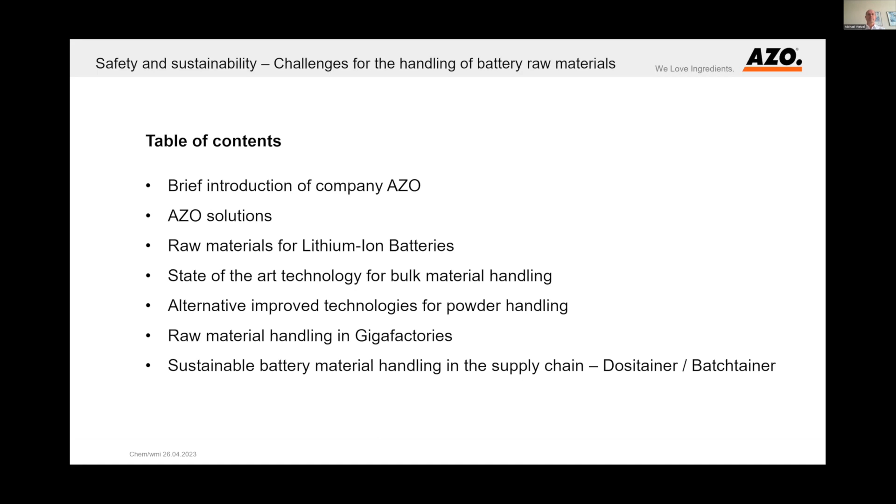The company AZO was founded in 1949 by the family Zimmermann. Next year we'll have our 75th anniversary. The foundation stone of our headquarters was laid in 1963 here in Osterburken. In our headquarters, we employ approximately 700 people worldwide. We have more than 1,000 employees across 9 AZO group companies. The turnover of AZO is around 180 to 200 million per year.

After this process step, we take over the material and feed it to further process steps. We can also provide the operating and controlling of the whole process together with the monitoring and documentation of the process.

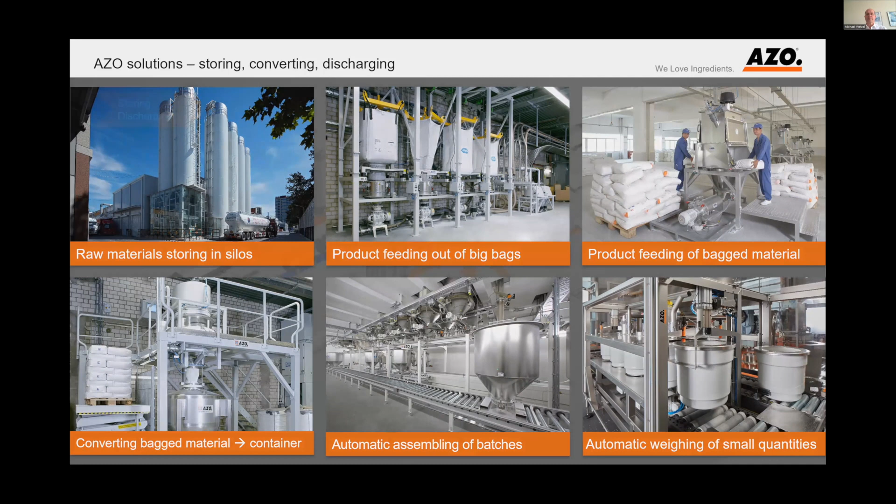Our core competences are also dosing and weighing. We manufacture screw feeders and weighing equipment. We do all kinds of feeding and cyclone screening. We can provide solutions for pneumatic conveying, whether suction conveying, dense phase conveying, or other types. As mentioned before, we're very strong in controlling and automation. Tracking and tracing is a very important issue, especially for the battery industry. And of course, we provide visualization systems and the collection of data.

Before we start with the design of a material handling and dosing system, we have to characterize the material properties. I would like to show a short movie which shows the process and the classification of raw materials into different groups. We've classified them into 5 groups, and we call them ingredients. This movie shows it shortly.

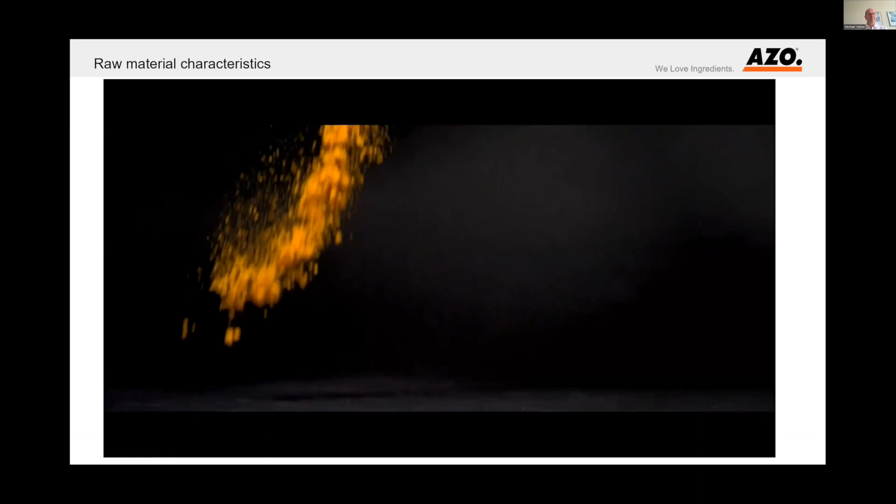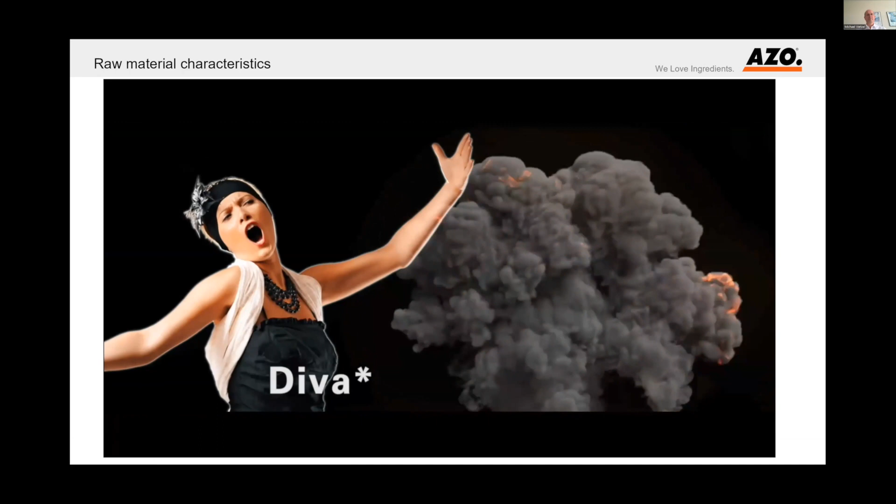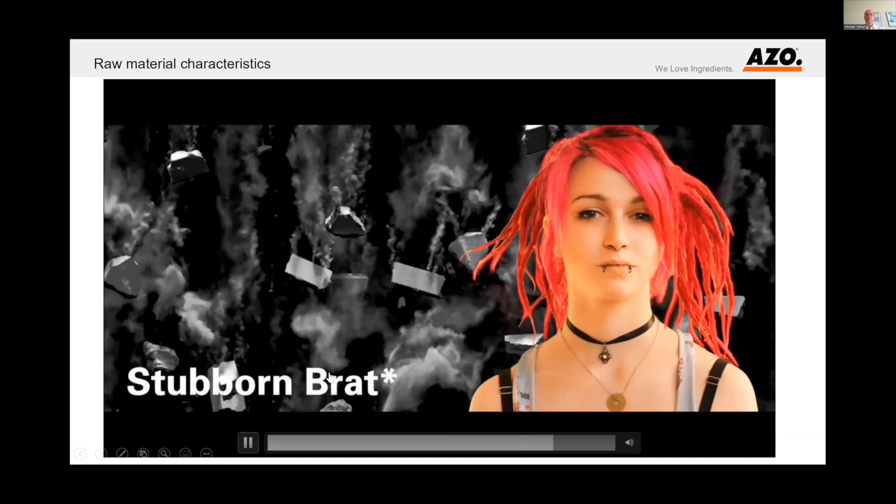All raw materials have their own individual properties and characteristics. Our knowledge of physical analysis is one of our core competencies. No matter how differently ingredients behave, we master them all. There are highly flammable, challenging raw materials, the divas. Others are difficult to control, free-flowing and dusty, the free spirits. Some raw materials are sensitive and fragile, the weaklings. There are obstinate ones that tend to cake and flow poorly, the stubborn brats. And very particular raw materials are abrasive or toxic, the meanies.

Okay, so this was a short overview about the different characterization of groups of raw materials. Now we'll have a look at the battery raw materials, and we'll see that some of them also belong to the unpopular products, like the meanies, which were mentioned as the last group.

So in all battery factories, we have an anode and a cathode line. And we have active materials, binders, conductive materials, and sometimes additives.

The active materials for the anode are mainly graphite, also silicon, which could have a share of 5 to 10%. For the cathode, we have many different chemistries like NMC, LCO, LFP, and so on, and also different grades of these chemistries. For NMC, for example, could be 622, 811, and so on.

For the binders, on the anode side we usually use CMC as a binder. For the cathode, the typical binder is PVDF. If we look to the future, for example for dry mixing and dry coating processes, PVDF is replaced by PTFE binder, which has some special characteristics.

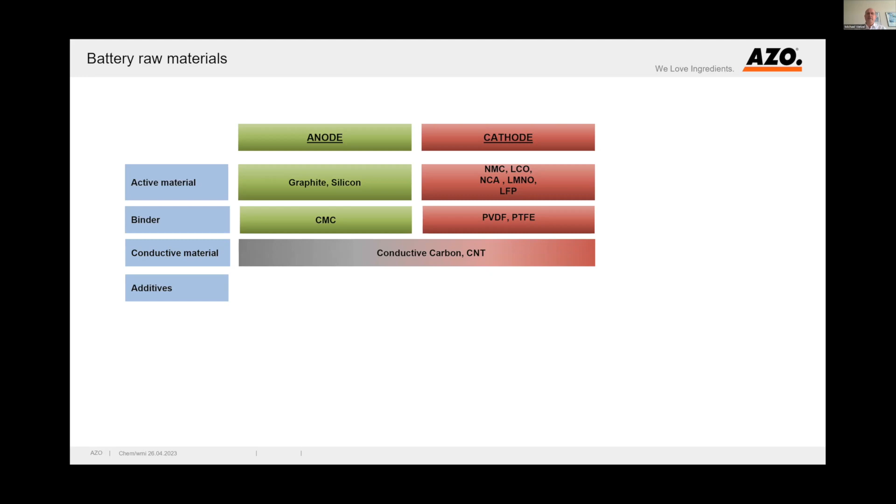The conductive material is always conductive carbon, and quite often carbon nanotubes also. These carbon nanotubes are sometimes added as a powder, or already prepared in a slurry and added to the mixer. There are few additives — typically one is oxalic acid, but this is not used in every factory.

Okay, so if we have a look at these powders, they have some typical properties. The powders are usually very fine, they are dusty, most of them are black except for the binders. And for all these powders, we have to care about operator protection.

Most of them are not hazardous, except for the cathode active materials and some carbon nanotubes, for example. But at least we also have to consider the OEB1 or sometimes OEB2 level for these powders as operator protection. There are some special materials.

I already mentioned this PTFE. This PTFE, for example, is very sensitive to shear and to high temperature. Sometimes it's a challenge to cool the material already during storage and to avoid any introduction of shear stress, because the fibrillization of this PTFE should be done later, in the next step — for example in an Eirich mixer, which is especially suited to open and fibrilize these PTFE fibers. So we have to care about the process protection.

And the most critical materials, as mentioned before, are these cathode active materials. There we have the issue of operator and process protection, because this cathode active material is always very heavy — we talk about a bulk density of 2 to 2.5.

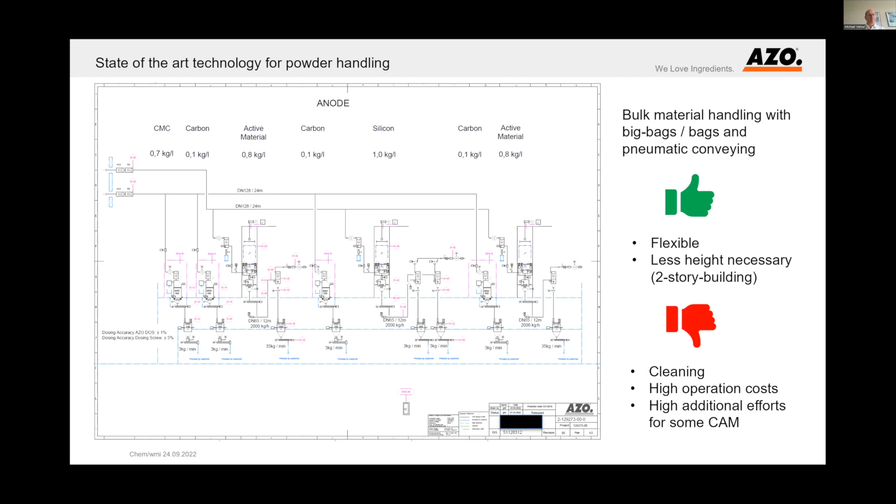Okay, now I would like to show some short animations about this core equipment in such a plant. So this is the principle of a bag feeding system.

So from this feeding station, you usually feed such a loss in weight feeder. This is an AZO-DOS, so-called AZO-DOS system. And the working principle is you can use it for batch process as well as for continuous processes.

If you have a batch process, it's quite simple. You have a gravimetric system, a load scale, and you weigh the material which is fed to the next process exactly. If you have a continuous process, you have the challenge to refeed this material during the process.

And usually the solution is that you do a gravimetric feeding during 90% of the cycle. And when you refill the scale, you have to stop the gravimetric feeding, and then you do a volumetric feeding for, let's say, 10% of the time. So this is a well-established solution for such a system.

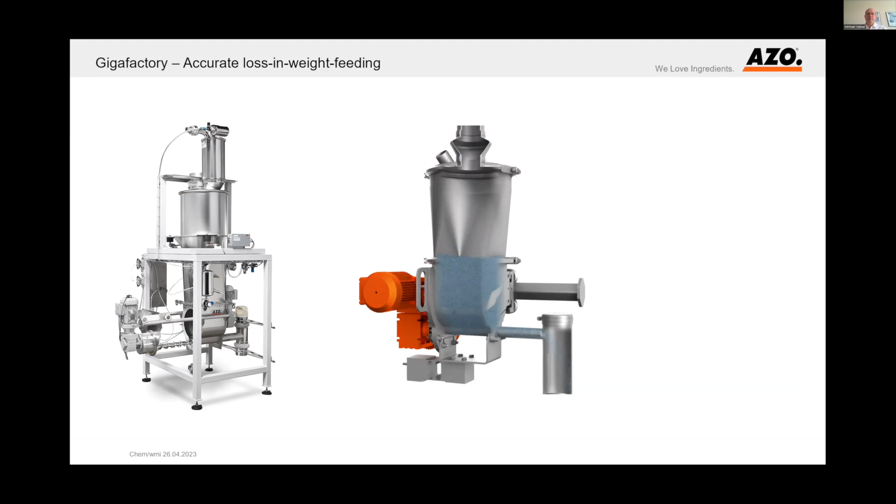Okay, so this is now, again, a diagram of the same system, but for the cathode here. And on the cathode line, we have another challenge, because for the cathode, we have this cathode active material, which is often hazardous.

In this case, we have a challenge to minimize the dust exposure and reach a higher OEB level. So usually it's requested to have an OEB3 level to minimize the dust exposure to the operators.

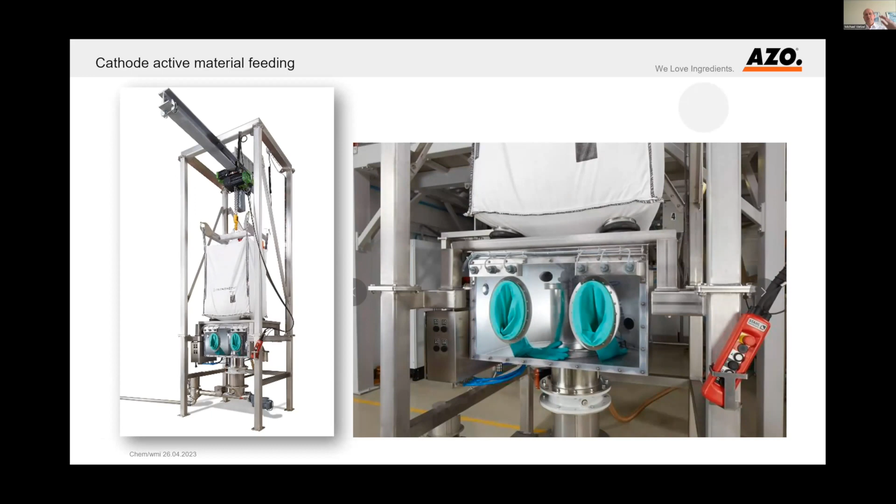And for such an OEB3 level, we have developed a special big bag discharge system. You can see it here. And I would like to show a movie showing the principle. I will stop speaking during this movie because it's self-explaining. So the principle is written down during the movie.

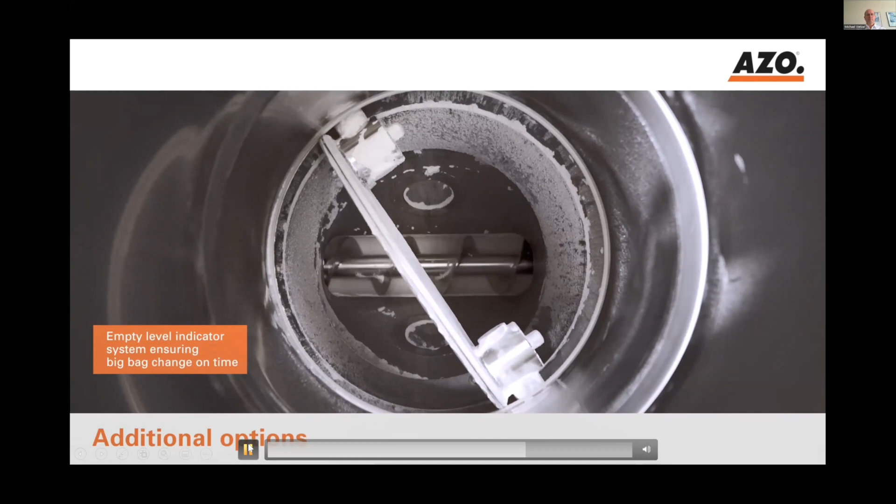Okay, so with regard to the time, I stop here because we just show some more options. But if you're interested, we can provide some more information.

Okay, so I would like to proceed now with a diagram showing an alternative concept. Generally, it's the same from the raw material delivery. We have the smaller materials in bags, the active materials in big bags. And the difference is we have a pure gravimetric system here without any pneumatic conveying.

And you can also see that we have one raw material feeding system, which is providing the raw material to two mixers, with a scale here, with a two-way distribution system. So this is quite economic because one powder dosing system serves two mixers.

And the advantages compared to this state-of-the-art combined system is the footprint of such a system is smaller. The operation costs are lower because we don't have to provide any dry air or even nitrogen for feeding or for transporting of the material.

Of course, we have also some disadvantages. The flexibility is a little bit limited because we just can provide the raw materials to two mixers. And of course, we need a higher building. This is usually a three-story building.

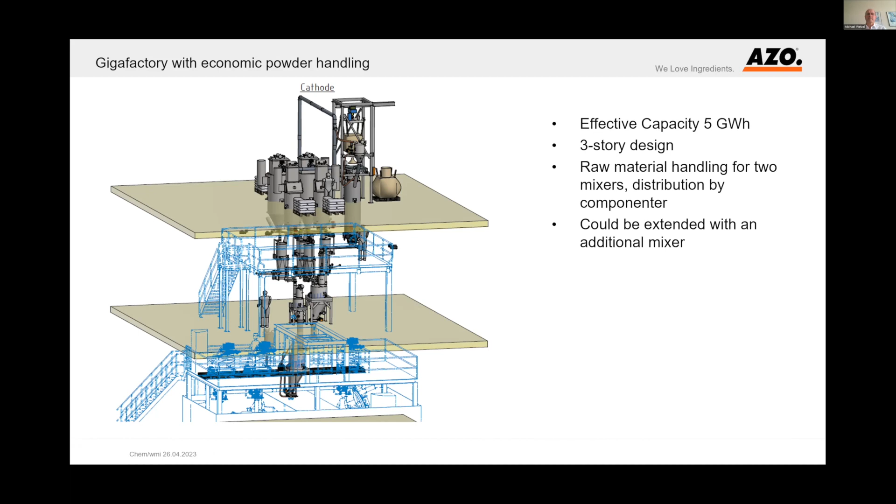In the battery industry, it's quite different, because if you consider the old-fashioned technology of planetary mixers, the batch times are several hours. Even if we go to the fastest system on the market, the Eirich mixers, we talk about batch times of maximum 20 to 30 minutes. But using such a concept would be possible. So we could use, for example, 2-3 mixers with 2 scale systems, or even more mixers. This just to give you an idea, and we are working on such concepts, especially with fast mixing systems in this industry.

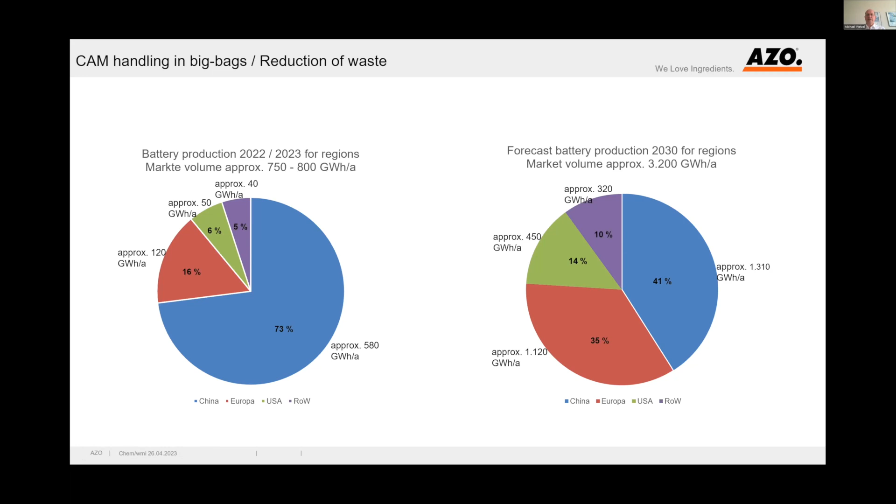So, regarding this calculation of big bag waste, I would like to focus only on Europe here. Based on these numbers which I've just shown, I've made a calculation about the waste which will arise. Again, I only focus on Europe, and only on big bags for cathode active material, and only cell manufacturers. Just to give you an idea, it's only a small portion of the whole industry.

So I've calculated based on the gigawatt hours today and in 2030, the cathode active material throughput in the plants, and based on these throughputs, I have calculated the necessary amount of big bags to fulfill these requirements. This is the calculation in big bags per hour, and this is the calculation in big bags per day. The production in such lithium ion manufacturing facilities is 24/7.

And the result is, if you take an average weight for a cathode active material big bag with inliner, we produce today between 5 and 10 tons per day of this hazardous waste, only with big bag material, with inliners. And this will increase until 2030 to 50 to 100 tons per day of hazardous special waste, only for the big bags and only for cathode active material.

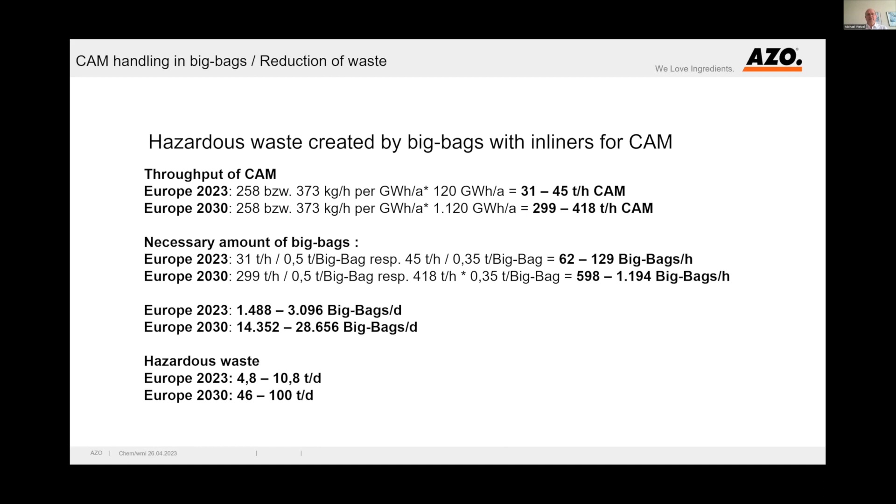So based on these numbers, our idea is to use containers or dositainers quite early in the supply chain. Our idea is to have cathode active material manufacturers fill the material directly into batchtainers or dositainers. And this animation shows the process of filling of such a batchtainer.

So you transport such a container, let's say with a volume of 1 cubic meter or even bigger, with an AGV or a forklift to the filling station. You place the container usually on a scale, and then you connect it with the filling flap, which is pneumatically driven.

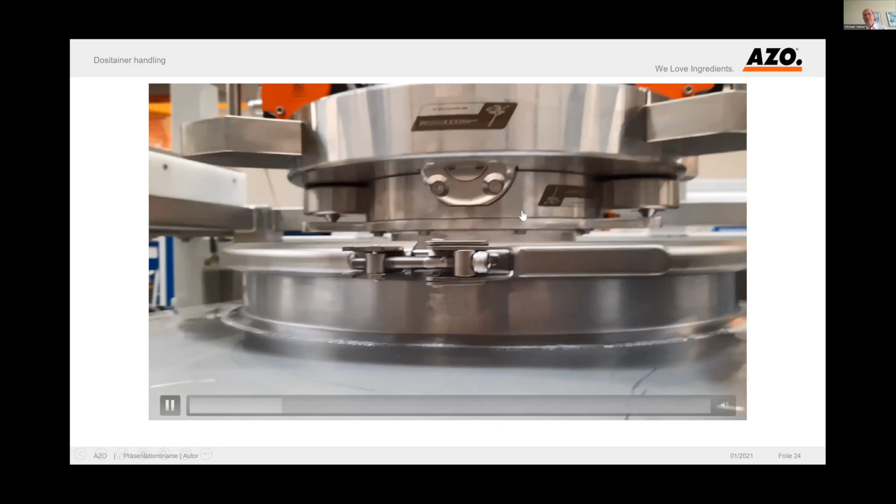So to give you a better idea about the process, I have this movie. This is such a filling station with split valve technology. This means it's used for OEB 3 level. On the container, we have the passive part here, this is the passive part of the split valve. And the active valve is lowered by pneumatic cylinders. Then it's connected and the flap opens.

So now this is in our workshop, it's not in a production facility. Now the filling of the container would start, and after the container is filled, just go ahead with regard to the time.

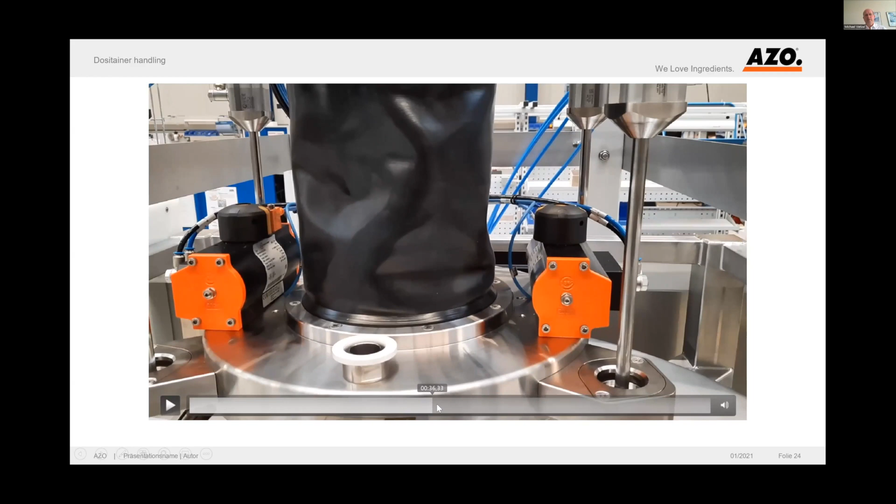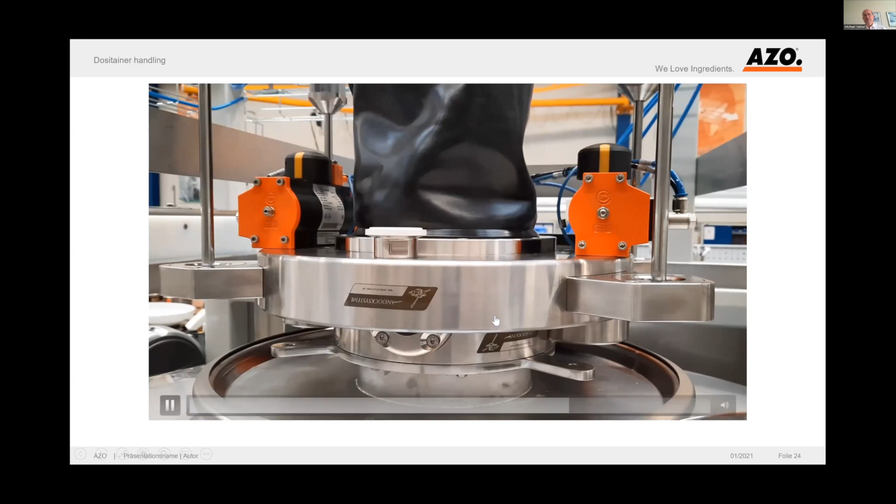After filling of the container, we close the flap and we lift the active valve again with the pneumatic cylinders, and then the container can be taken out from this filling position. And this is a completely dust-free system due to this split valve technology.

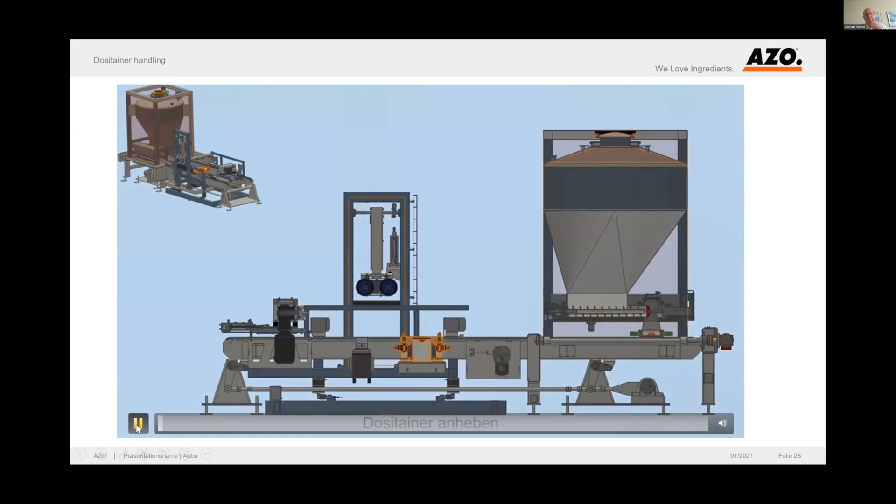Okay, so the next step, now the container is filled. That could be in the workshop of a cathode active material manufacturer. And then the container is transported to the cell manufacturer. And at the cell manufacturer, we have a discharge station. This is shown in the animation here. There are also different solutions for discharge stations. This is a quite complicated one with a roller conveyor. Could also be simplified with just a forklift or with an AGV. So in any case, you have to transport a container to the discharge position.

I have some problem with the movie.

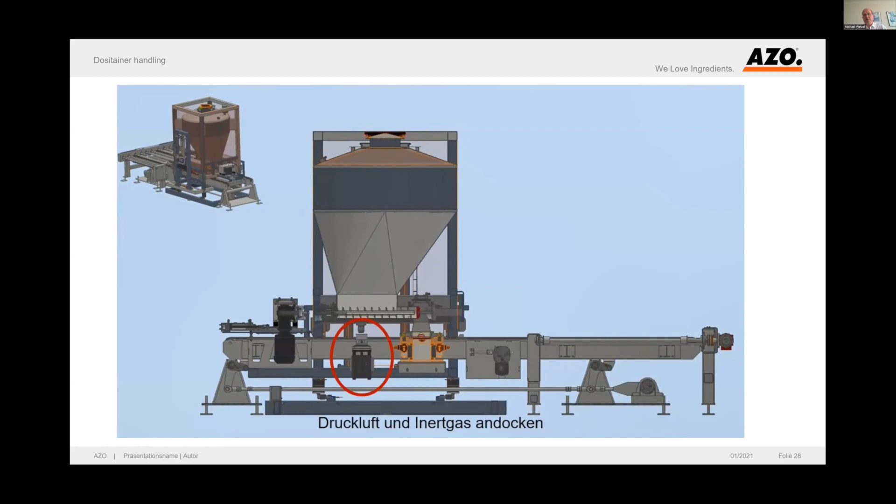Okay. The container is lowered. So the split valve, active passive valve, is connected. Then we connect the compressed air. So in the next step, we do the docking of the drive for the screw feeder. So the screw feeder is without motor, a part of the dositainer. And now we do the docking of the drive of the screw feeder.

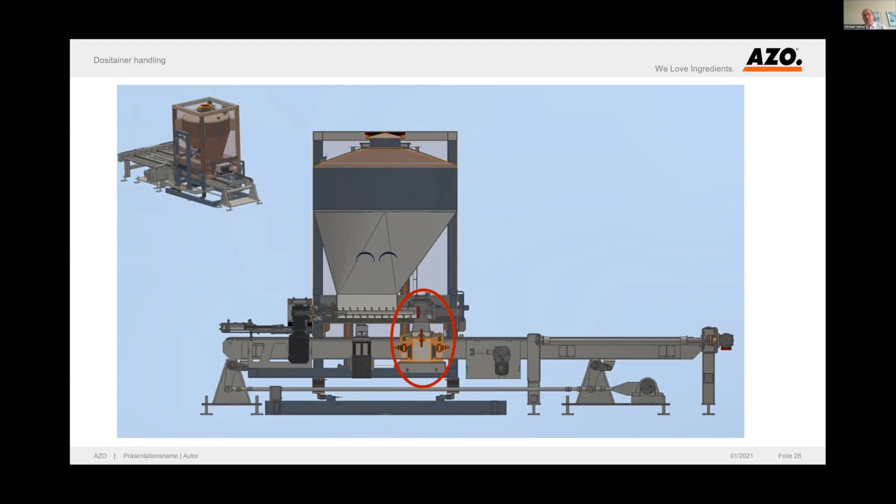We open the screw, the cone at the end of the screw, and we open the split valve. And now the dosing of the material is done to the follow-up process. So with a dositainer, we don't need an additional scale because this is installed on a scale, and we do exact dosing to the next process step.

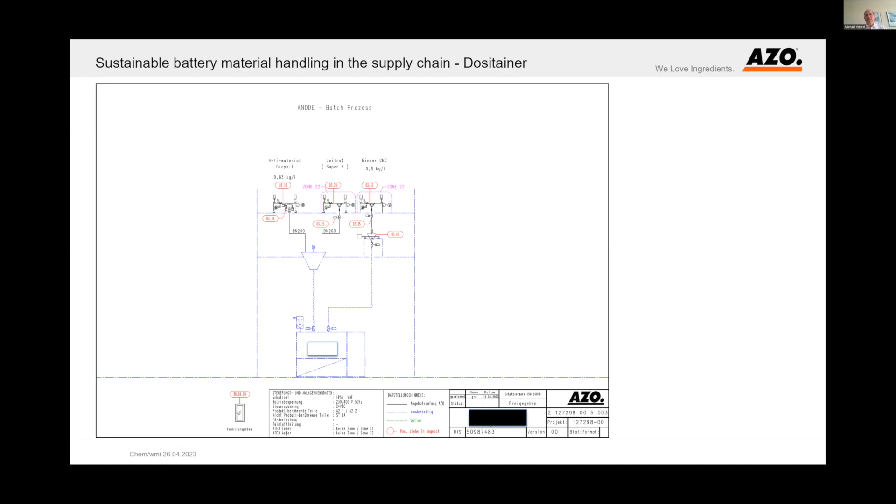So if we can convince the raw material suppliers and the cell manufacturers to establish such a supply chain, it would make the raw material handling much more efficient, safe, and sustainable. And it has many, many advantages. Of course, we have to also mention there are few disadvantages because the initial costs for such systems are slightly higher compared to a state-of-the-art system with gravimetric feeding or combined gravimetric and pneumatic feeding.

And the other challenge is it doesn't make sense if the active material supplier or the manufacturer is in Asia. So the transportation distance has to be quite short, but this should be solved in future because more and more active material suppliers will establish their workshops quite close to the gigafactories. And so if the distance for transportation is quite close, this will be definitely the most efficient, sustainable solution for this raw material handling.

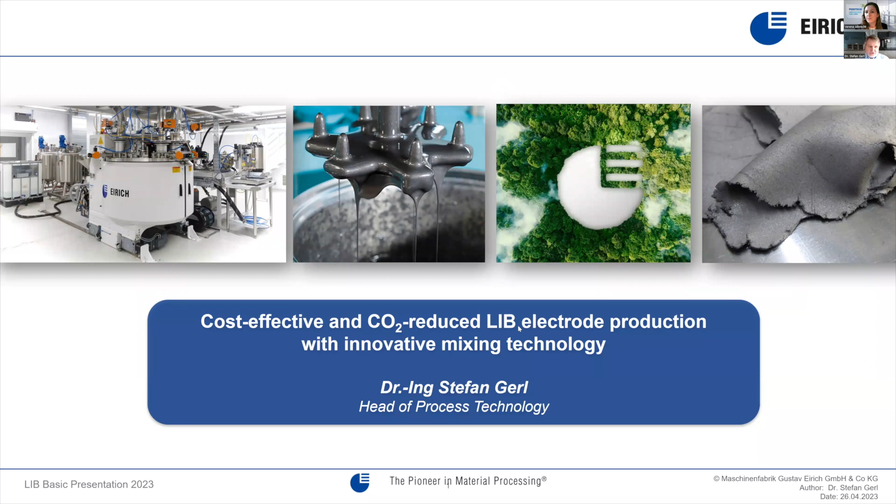Eirich is even a little bit older than ASO. This year we have our 160-year anniversary, a family-owned company similar to ASO. We are dealing in lots of different industries, but mainly in the lithium-ion battery application. We have different areas. This is the upstream raw material preparation for the active material, like cathode active material, mixing of precursors and functionalizing, meaning coating with nanoparticles, for example. On the anode raw material side, we have production of synthetic graphites by mixing of carbon, coke and pitch, which is then graphitized into synthetic graphites. More and more often customers are using our technology for silicon carbon composites, meaning it could be a coating like in the cathode active material, but it could also be incorporating silicon particles into a powder mix, which is then synthesized to a silicon carbon composite.

But today we want to concentrate on electrode production, where the classical electrode production is made wet, meaning we have to produce a coating slurry out of the powders. Then we have some special applications. We call it semi-wet, where we increase the solid content significantly. Typically, the forming is made by extrusion. And last but not least, the now upcoming process is the complete dry application, where we have to produce a structured dry mix with calendering and pressing, and then winding.

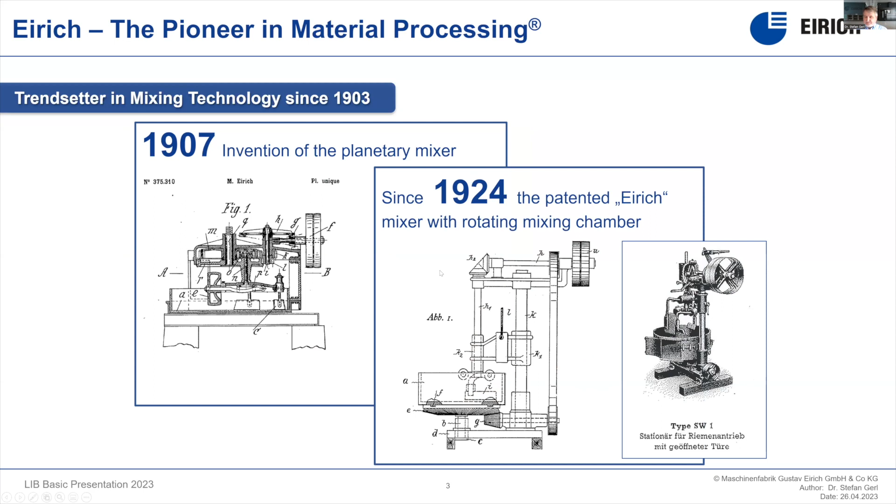As I mentioned, we have a rotating mixing chamber, which is taking care of the transportation of the material. If we have a static mixing chamber, like in a planetary mixer, the mixing tool typically has two tasks: first, transportation of the materials, and secondly, the mixing. If you increase the speed of the tool, the transportation typically collapses, because centrifugal forces push everything to the outside. This means these kinds of machines with static mixing chambers have to run at a reasonably low speed, which is not good enough to disperse and dissolve fine aggregates like additives such as carbon black or nanoparticles. So in the end, they need a second dispersing tool to do this job.

In the Eirich mixer, the movable or rotating mixing chamber now takes care of the transportation, so that we can work independently with our eccentrically mounted mixing tool. So we are free to choose the shape of the tool. We are free to choose the speed, which can be very gentle and soft, or very aggressive. We typically operate our machines up to 30 meters per second. For dry battery application, we can go even up to 45 meters per second, and this not only in the small scale machine, but also in full scale production machines.

We have a static wall and bottom deflector or scraper, which was made really scraping for the battery application, to make sure that we have no powder or plastic body adhesions on the wall or bottom, to be sure that 100% of the solids are really incorporated into the final slurry.

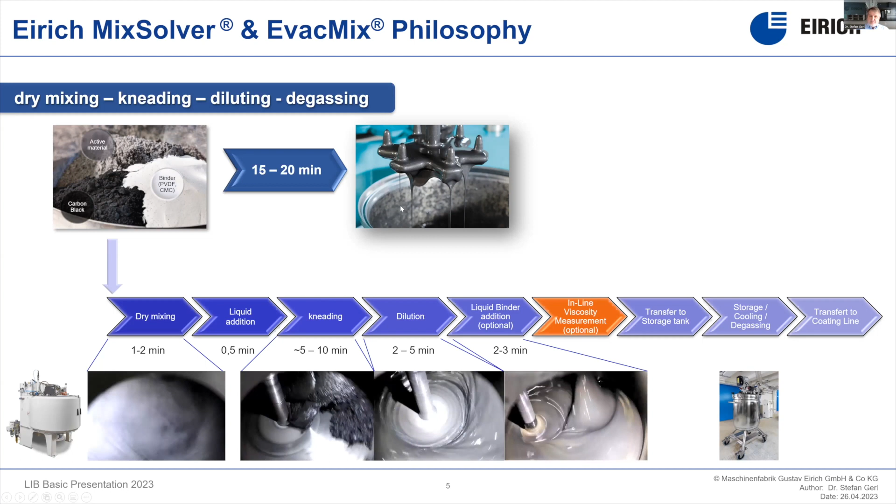The overall batch time, from in to out, we calculate between 30 and 40 minutes, depending on the filling of the machine, because the extraction takes a bit more time than in the past with our concentric discharge systems.

The advantage of the system is that you can adjust all parameters like time and shear rate, and even make sub-phases within the kneading phase. We have an additional possibility to measure viscosity like a viscometer inside the machine: since our tool doesn't contact the bottom or wall, we can stop the mixing chamber, start rotating the mixing tool at defined speeds, and measure the torque, getting a response like a viscometer.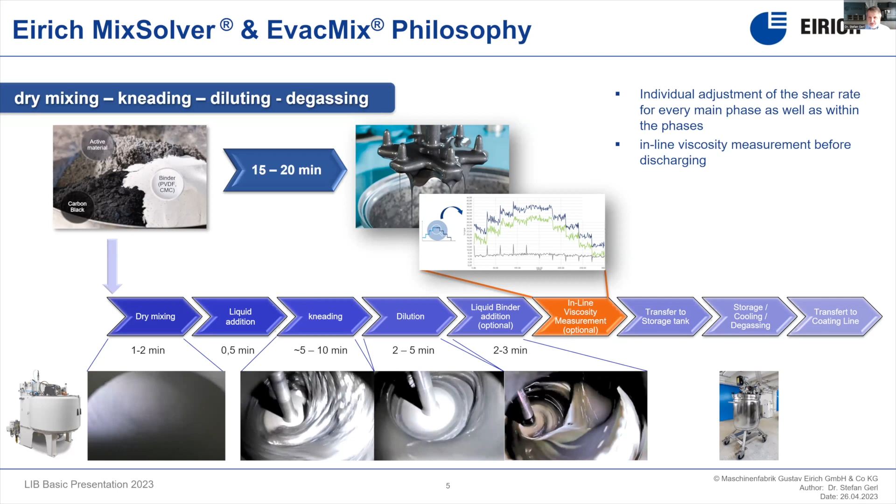This helps us qualify the slurry before discharging it into the downstream transfer and storage tanks. The inline viscosity measurement can be made at the last stage, or in between, and it could even be repeated several times if necessary, to qualify the slurry before discharging.

We have different options. With a non-vacuum machine, we typically apply vacuum in the storage and degassing tanks downstream of the mixer, which is a cheaper version. Some products don't need vacuum application during operation.

On the other hand, with our EvacMix vacuum technology, we apply vacuum in the final phase of the first liquid addition, doing the kneading already under vacuum, so that we don't incorporate any gas or air from the very beginning. By this, we can make sure we have a 100% degassed slurry already at the final stage of preparation.

I have to switch one back. Here we see a view into a full-scale production machine. It's a 500-liter R12 mixer. You see the different phases.

On the lower left side, you see the kneading phase, the plastic body moving at high shear rates through the machine. Here is the final slurry after liquid addition. You see the clean walls, coming from the effective wall scrapers. And here during discharging of the slurry, at the end we have a very thin layer of liquid covering, for example, the mixing tools, but this isn't interrupting our process.

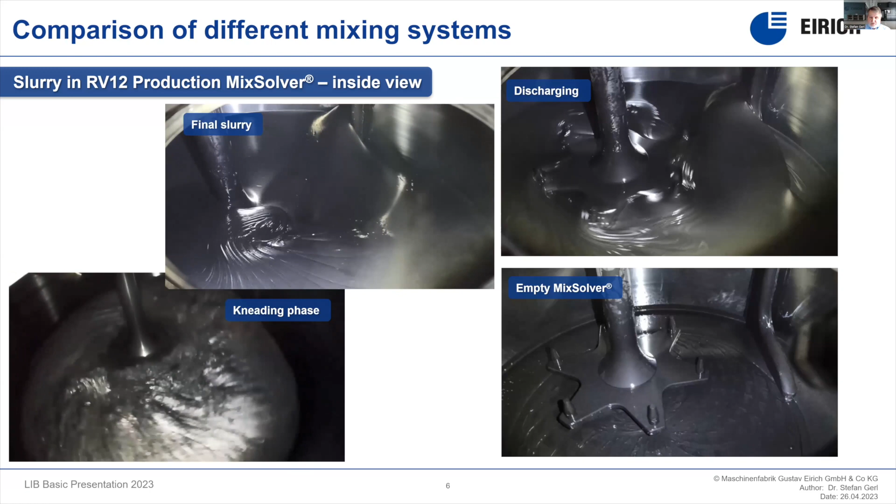So if we are working in a gigafactory batch by batch, this is good enough to prevent any problems in repeatability. By this, we can make sure that we have a high output out of a very small machine.

Lots of customers are asking for continuous process because the continuous systems have some advantages for the customer. But you see at the end that also a continuous system like a twin screw extruder is just the mixer itself and maybe part of the dosing system. As Michael Wetzel explained, changing over from gravimetric to volumetric in between is really continuous - these are the green parts. You have lots of equipment like powder dosing, pre-mixing, binder solution preparation, degassing, and storage tanks between the mixer and the coater as a batch-wise operation. This also has to do with the fact that no operating company in a gigafactory would allow applying directly out of the mixer without qualification and without any buffer tank directly onto the coating line.

Eirich has a quite similar solution - we call it Conti feeder. We have an automatic batching system which is even more accurate because we can control it, and we are extremely highly flexible in changing over the recipes. The material will be collected in a balance or charged directly into the mixer.

Then we start our batch process like shown before, and then we go into a series of tanks. Typically we have one tank directly connected to the mixer itself, which has the same volume. By this, we are sucking out the coating slurry. With vacuum, we can qualify it. We can take samples, and we can put in these systems with return pipes additional sensors. If this batch is qualified by the operator, we send it into buffer tanks, which are then connected directly with the coater, so that we have a continuous supply of the coater, which is the most important part for the customer.

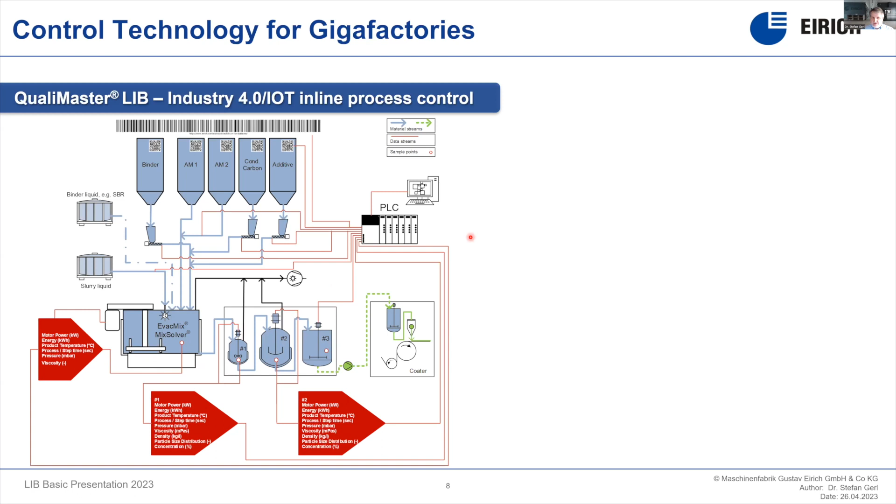All of this can be fully automated, starting with barcode readers for the raw material or QR code readers for raw material identification. We monitor all the data coming from dosing systems. We have the mixer with motor power, energy, temperature profile. We measure the viscosity with our inline rheometer. We have the same data from all the tank systems, which is all collected with our PLC and can be visualized with our ProView system, which makes it easy to compare different batches, set trend curves or tolerance bands to allow inline monitoring of the production process.

We are offering these collected data, of course, which can be used for data mining or artificial intelligence methods. We offer different versions, starting from what we call QualiMaster LIB, from ECO, which typically means OPC UA communication with MES systems. We have the QualiMaster ProView for data trending - we measure product temperature, we have inline viscosity measurement which comes with the machine without additional equipment, measure motor power, energy. And if you want more, we can add lots of sensors like viscosity and density as inline sensors, or even up to particle size distribution and concentration, which at the end is just a question of money.

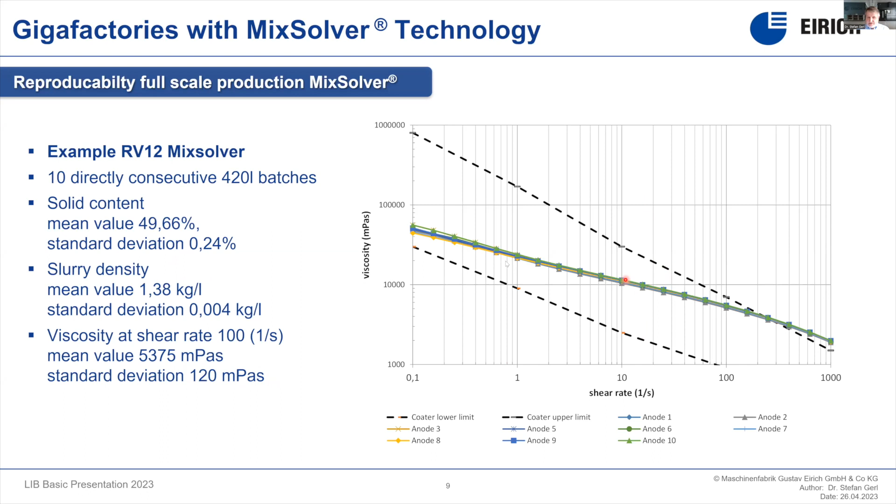This graph shows, out of a full gigafactory scale - a 5 gigawatt-hour factory in Asia - how good the reproducibility of our system is. We made for SAT 10 directly consecutive 420-liter batches, and you can see that the mean value for the solid content is quite low, and the standard deviation is quite low. This is mainly attributed to the dosing system, either the powder dosing or the liquid dosing. The same is true for the slurry density, because this is mainly affected by the dosing system, like the solid content. The viscosity is also in a very narrow range. The upper and lower black lines are the typical upper and lower limitations of the coater, and we are sitting in between with excellent reproducibility batch by batch.

How different gigafactories could look like - we have different concepts. One is for low capacity applications, typically in the range of 0.5 to 3 gigawatt hours, which means at the end we have one mixer located on the ground floor. As Michael showed before, we have a 2- or 3-story system. On the top level we have the bag and big bag handling station, a second floor with the automatic dosing system to achieve the necessary accuracy in powder dosing, and all the liquid dosing and liquid transfer system then on the ground floor together with the mixer.

Another project size is then a 5 to 6 gigawatt-hour factory with 2 machines in parallel, also like shown by Michael Wetzel - this 3 level system, on top again the powder bag and big bag dumping station, then the dosing, and then the distribution system between the 2 machines. It could be a valve, or it could be this movable container.

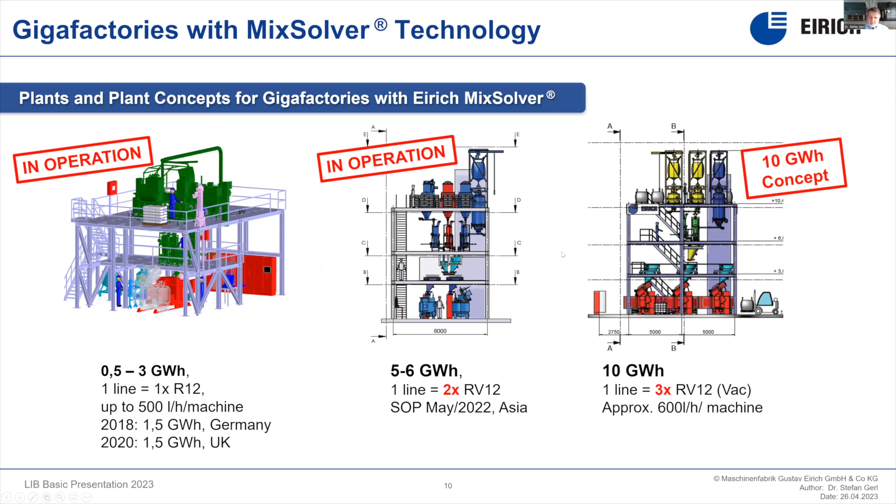This is then the option with 3, and we can go up to 4 machines in a row. This means you're really using the dosing system in the best way, distributing between the 3 or 4 machines, which are then working more or less in parallel. By this, we can reduce the footprint dramatically. And even if the height is a little bit higher than with a pneumatic system, we are still much lower in height compared to these extremely big planetary mixers.

There's a view into the UK big pilot facility where Eirich and AZO have delivered the machines. The complete control system is coming from Eirich. So the heart is, of course, the R12 mixer. We have then the AZO DOS systems here directly mounted on top.

We have the liquid distribution and dosing systems for small amounts like SBR, or the high amounts like NMP or water. And we have here, what we call batch pure, the movable transfer tanks. These tanks are connected to the mixer, filled with a slurry, qualified, and then moved manually to the next door.

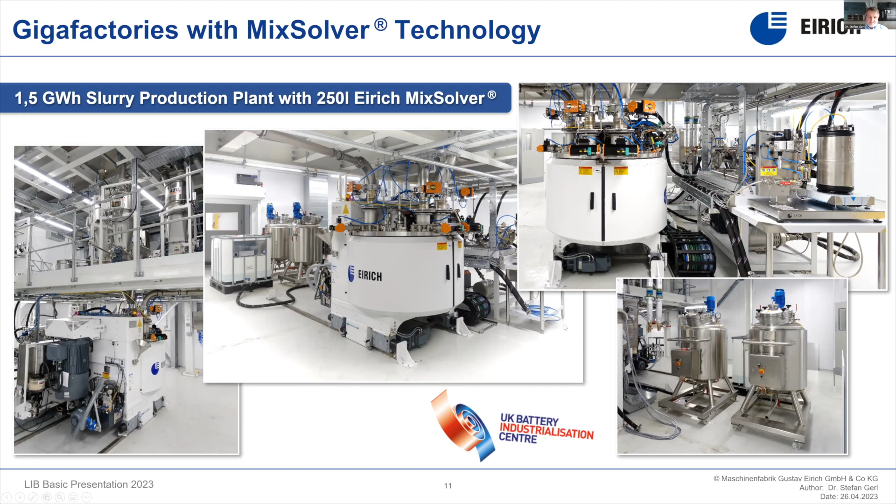This is a top floor with glove box system, with sack dumping station, with inline sack compactors. And here we have, for example, a big bag station for graphite, then also the dosing system.

What I want to give you an overview about is the energy consumption and size of the machine, comparing it with extruders and the classical PD mixers. Even if PD mixers are quite big, typically they have 1500 liter, 2000 liter, up to 4000 liter even. And if you use just 80% of it, this means in a 1500 liter machine, you can typically produce 1200 liter of coating slurry. But because of the long mixing time, typically 6 hours, you have an output which is just in the range of 100, maybe 150 liter per hour.

So this means at the end, if you want to go into gigafactory scale, you need a huge number of machines operating in parallel, which is, of course, then the problem to distribute all the raw materials and also to collect all the final slurry from the machines.

On the other hand, we have the extruders, which have a retention time in the range of 1 to maybe 10 minutes. They can produce an output in the range of small to medium-sized gigafactories, depending on the size. But they are limited in flexibility, because if you want to change over the product, you also have to change the screw, for example, or screw geometry.

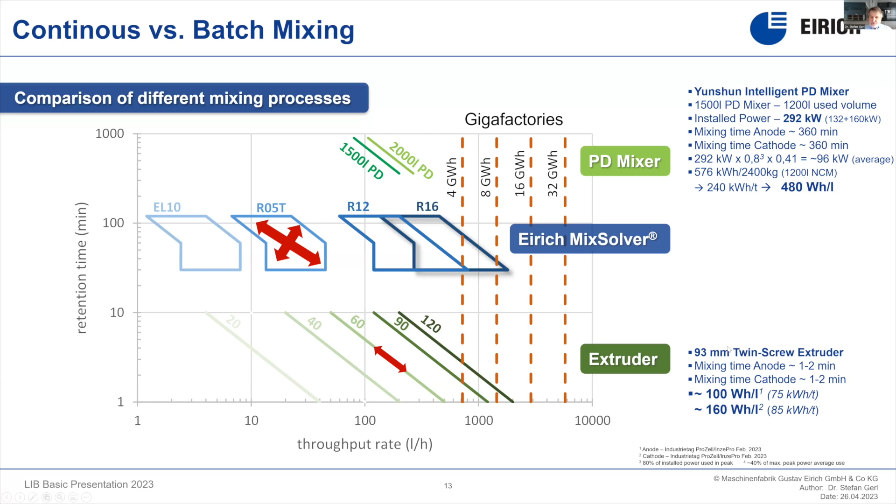With the Eirich mixer, you can go down even more. Even if we have big motors like 60 kilowatt for rotor and mixing chamber, we have just a very, very short peak where we need this extreme high motor power, and then it falls down again during the kneading phase. This means we have just an average of about 12 kilowatt, ending up with about 16 watt-hours per liter. This means we are saving, compared to the PD mixer, more than 90% of the energy.

What does this mean in view of costs? First of all, of course, we have the cost for the electricity. And we're talking here about gigawatt hours of electricity, for a 15 gigawatt hour plant with about 3,000 liter capacity.

For a PD mixer, we already have 20 gigawatt hours of electricity needed to operate these machines. On top of that, we have the energy consumption for the chiller, because 90% of the energy we use for moving the material isn't really used for mixing or dispersing, it's mainly used for friction. This means it's heating up the material, and this has to be compensated by a chiller, so you have to add at least the same amount on top. It's even higher because of the lower efficiency of the chiller itself.

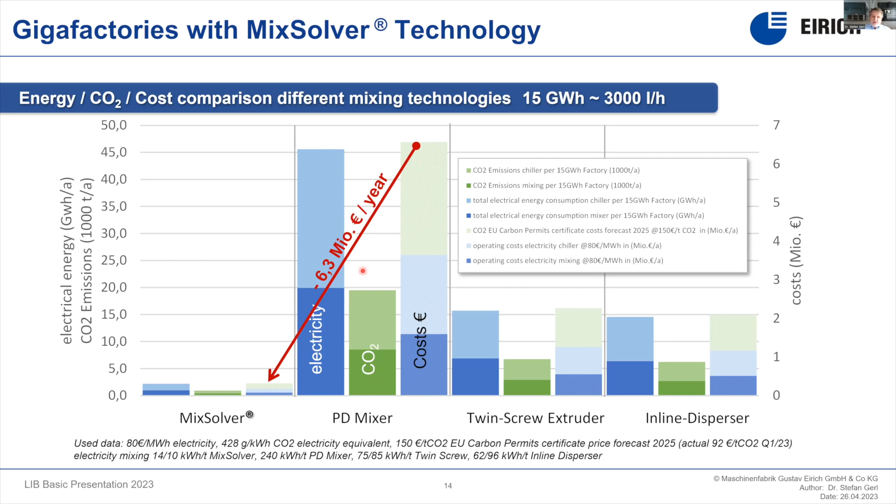At the end, we also have CO2 emissions we can calculate. We end up with a huge cost block, for example for the PD mixer in total on electricity costs and CO2 certificates, which has to be paid to the European community, the European Union, for example. So at the end, you can save 6.3 million euro per year just by using a different mixing technology.

The next technology to save even more energy and CO2 emissions, to make it more sustainable, is the transfer from the complete wet application to the dry application. Here I want to show you the differences in the application, or in the complete electrode production.

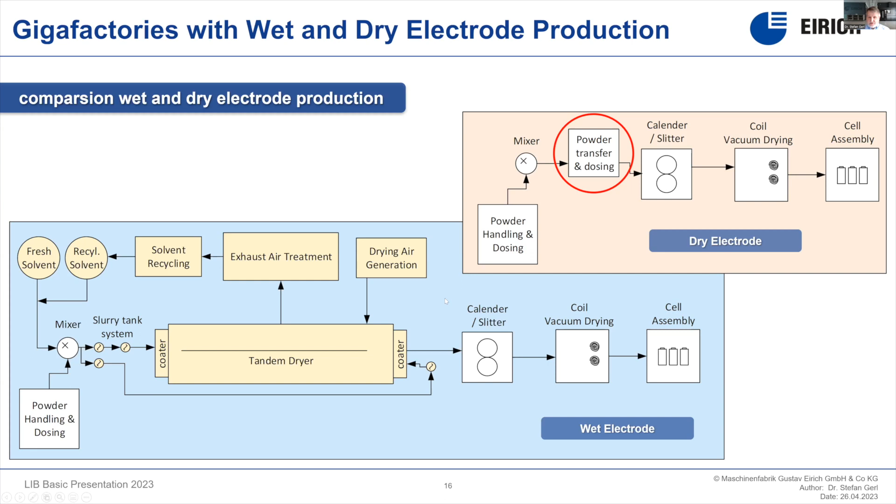The Eirich mixer is now capable of running with this kind of electrode as well. We work in a bit of a different way. First of all, we add carbon and active material, which could be cathode or anode active material. Then we typically coat the active material, meaning we disperse the carbon black in a way that it really sticks to the surface of the active material. We can see whether we've achieved this or not when we tap the material, to check if free carbon is still floating on top of the mix.

If we go on with the mixing time or increase the mixing speed, then after a certain period of time, significantly longer than the time for just pre-mixing in the wet application, we have a fully coated active material. Then we add the polymer binder, which is typically a PTFE, and mix this in. At the end of this first step, we have a homogeneous powder mix, which can already be applied for a dry application, when you're hot rolling it directly onto the collector foil.

Or we now start fibrillating the material by introducing higher shear forces and heating up the mix. After a certain period of time or certain temperature, we can form the material if we are pressing it. Depending on the kind of PTFE, the shear rate, and the time, we have a full plastic body which can be formed, and you could easily imagine that this material can be rolled out like a cake to form a freestanding film.

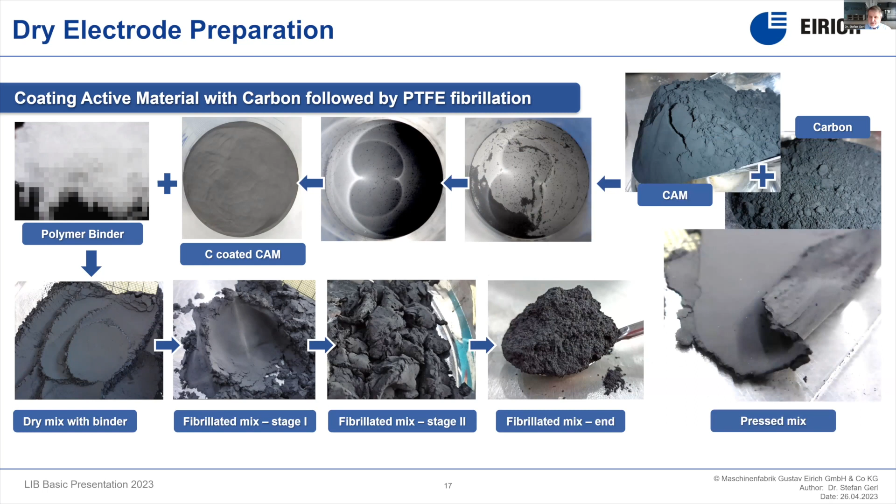Customers, of course, ask whether this is possible not only in lab scale, but also in large scale. So we have performed scale-up trials several times for customers on our 75-liter machine. This means going from a 4-kilo batch up to an 80-kilo batch. We prolonged the mixing time a little bit because cooling takes more time in a bigger machine than in a smaller machine, but at the end, we end up with exactly the same material properties.

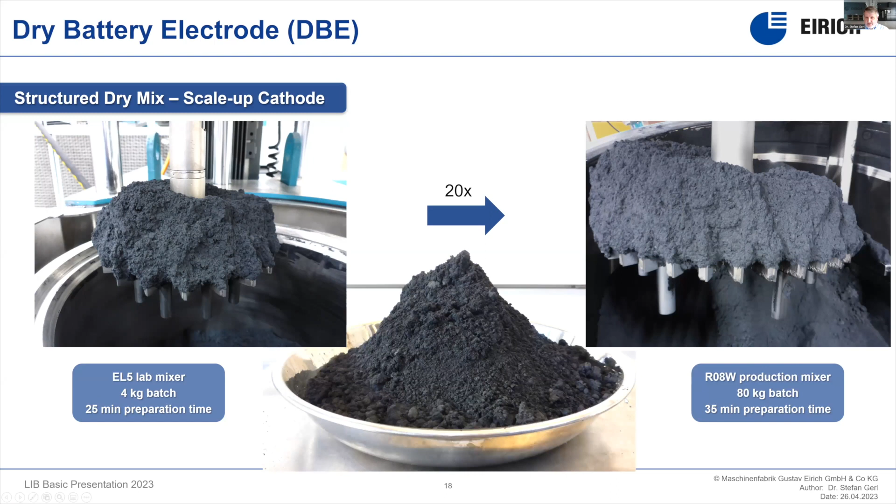To summarize my presentation, you have seen that we have a simple and smart process technology. We have significantly higher output performance compared to other mixing technology, especially the PD mixer. We have the highest flexibility in terms of raw materials and processing routes. This means, as you have seen, you can make wet, semi-wet, dry, and different dry routes. We typically have a very short batch time, just minutes instead of hours.

We have excellent scale-up capability, 90% less energy consumption compared to state-of-the-art technologies. This also means significant CO2 emission reduction and higher sustainability. We have outstanding operating cost savings compared to traditional PD mixers, so that even if we had a higher price—but we get feedback from customers that our price is absolutely competitive to PD mixers, even lower—you would have additional savings every year.

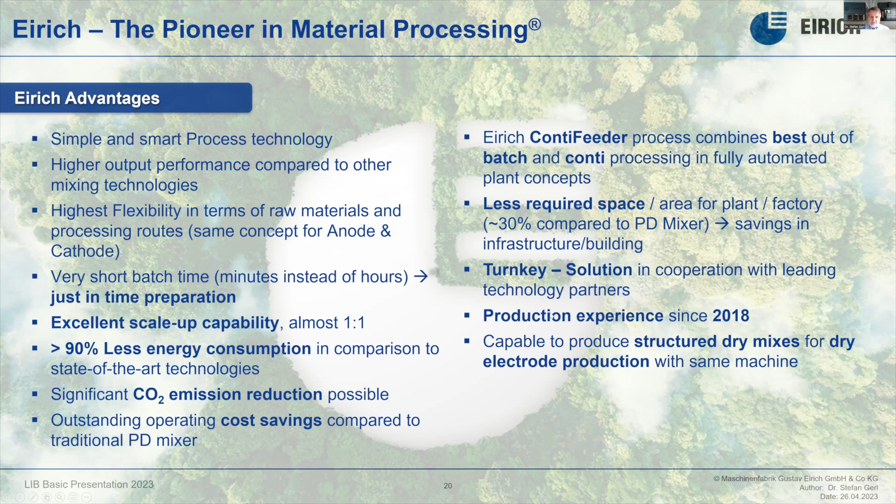We have ContiFeeder technologies, which allow continuous supply of coating slurry to the coating line. We have significantly less required space, meaning savings in infrastructure and building. Eirich works as a turnkey solution provider, mainly from powder in, to processed electrode material, to downstream equipment like the coater or calender. We have production experience since 2018, and the same machine is capable of producing a structured dry mix. So to summarize in one sentence: we have a highly sustainable mixing solution with maximum flexibility and upgrade capability for all types of electrode production.

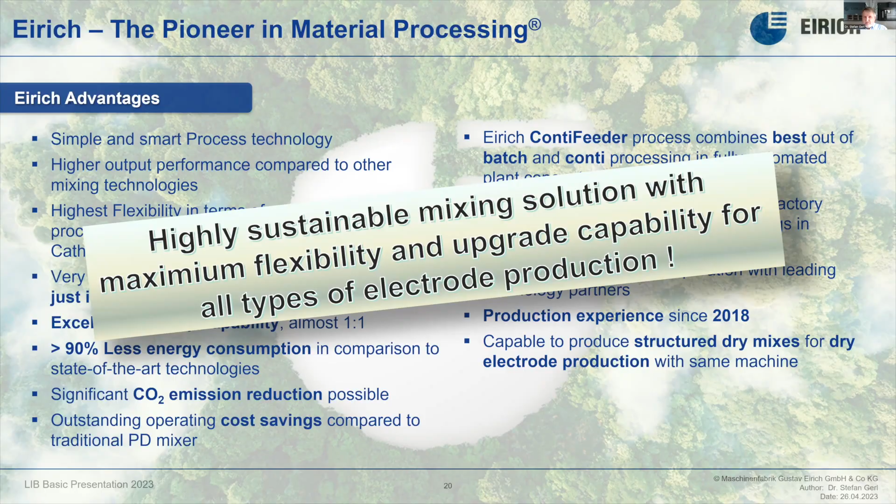Thank you very much for listening.

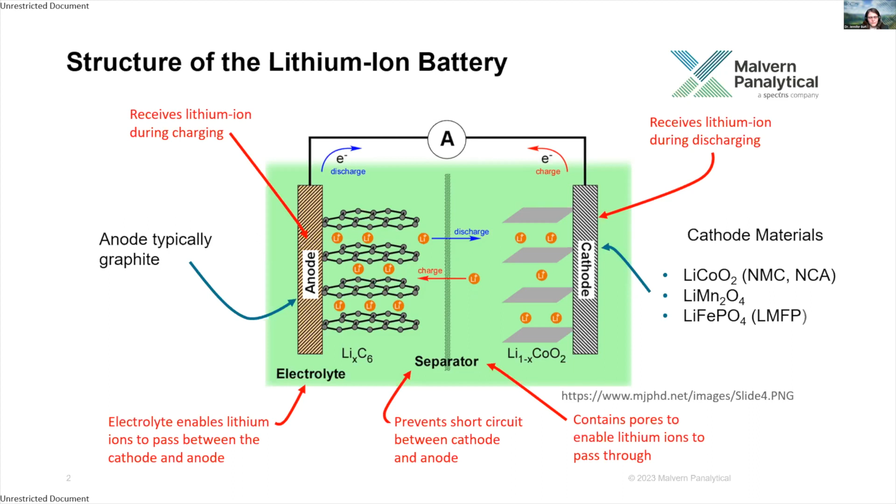Each cathode material has a typical battery profile, which covers the 6 key requirements for a battery. It needs a high energy density, which is how much energy the battery stores. It needs a high power density, which is the ability to deliver a high current. It needs to be safe to avoid issues like thermal runaway events. We also need to consider factors such as its performance, its lifespan, so how many times we can cycle it, its longevity, and of course cost. On top of this, sustainability is also really key.

Battery technologies are evolving fast, which presents both an opportunity and a challenge. Materials are changing all the time and new options are constantly being discovered. The particle size and shape of these electrode materials, both the well-established ones and the new ones coming through, will directly impact the battery profile. Hopefully over the next few slides, I'll show why this is the case.

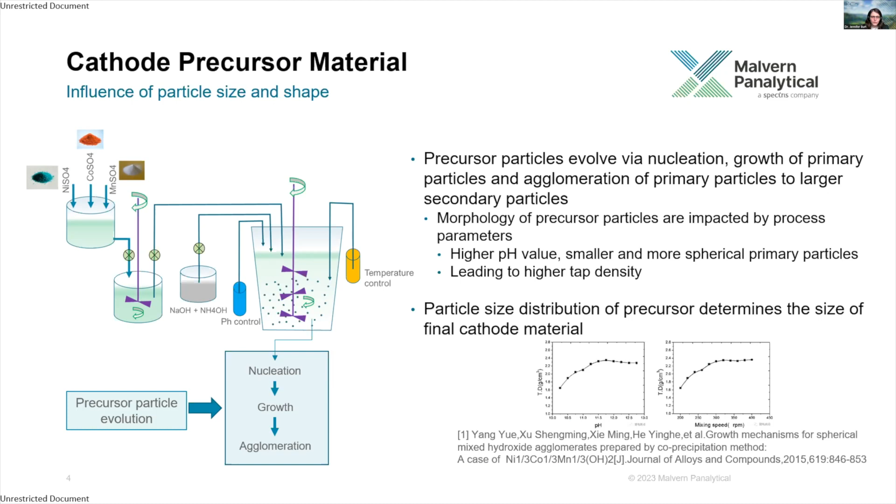As the particles get smaller, they can charge and discharge faster due to their larger surface area to volume ratio, but they'll also suffer from a lot more electrolyte erosion at the surface of the particles, with this degradation increasing with cycling. So the desired particle size of the cathode material is therefore a balance somewhere in between. So generally, large particles will hold lots of lithium ions and they will have good specific energies, while the large surface area to volume ratio of the small particles enables lithium ions to be transferred between the electrolytes easily, so they can generate a lot of current, leading to high specific powers.

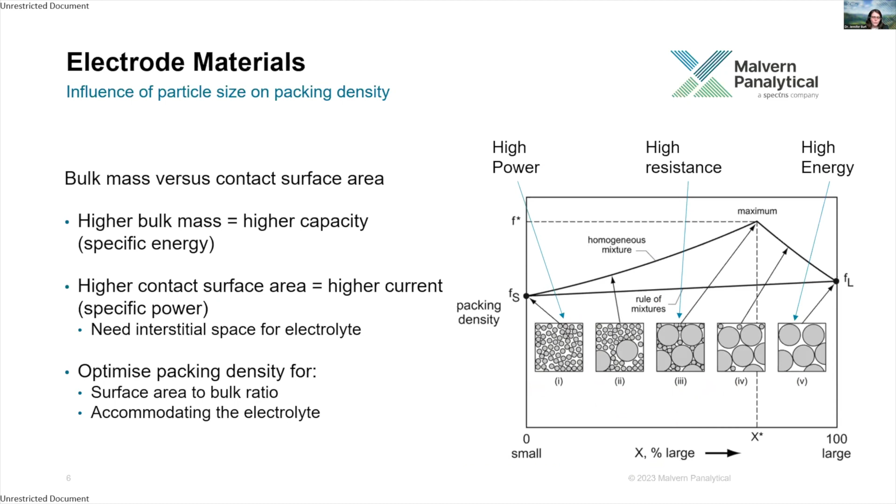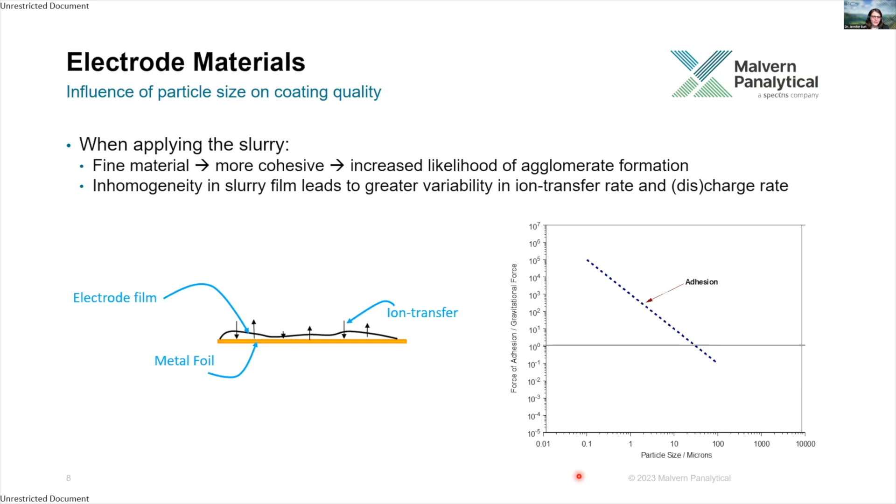So we've talked a lot about size, but particle shape is also important. Going back to packing density, irregularly shaped particles can reduce the packing density, which will increase the interstitial space for the electrolyte between the particles, which increases the ion transfer rate. However, irregular shapes can cause particle friction and interlocking, which can increase the viscosity of the slurry, which impacts its application.

Generally, more spherical particle morphologies are preferred due to their ease of packing.

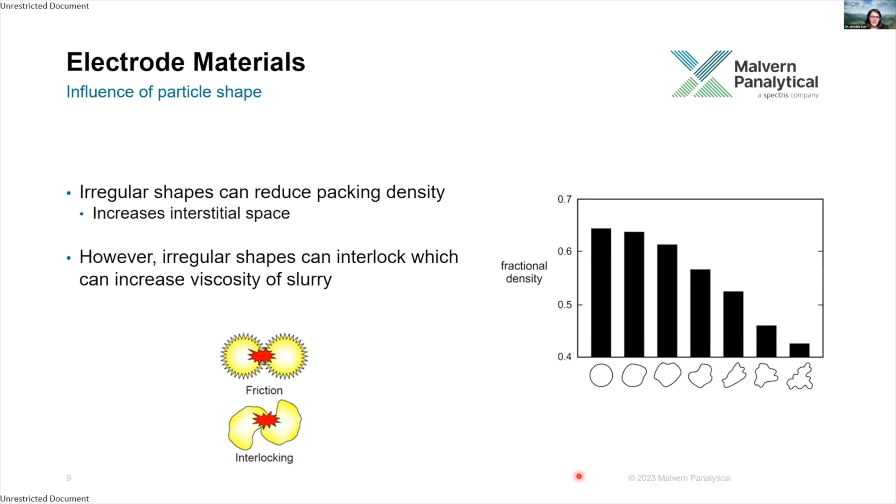So that should have hopefully given a few examples of why we want to measure particle size and particle shape, and where it's important, where it's influencing the battery production processes and the battery performance. So now we'll look at how we can measure and monitor the particle size of electrode materials using laser diffraction.

So the Mastersizer 3000 is the world's leading particle size analyzer for rapid and reliable particle size measurements. It covers a very wide particle size range, so we can go from 10 nanometers up to 3.5 millimeters, and this uses a single optical measurement path. Both wet and dry analysis modes are available, so this means that we're able to measure powders, dispersions, and emulsions, and it also has excellent chemical compatibility, which allows us to handle solvents such as NMP.

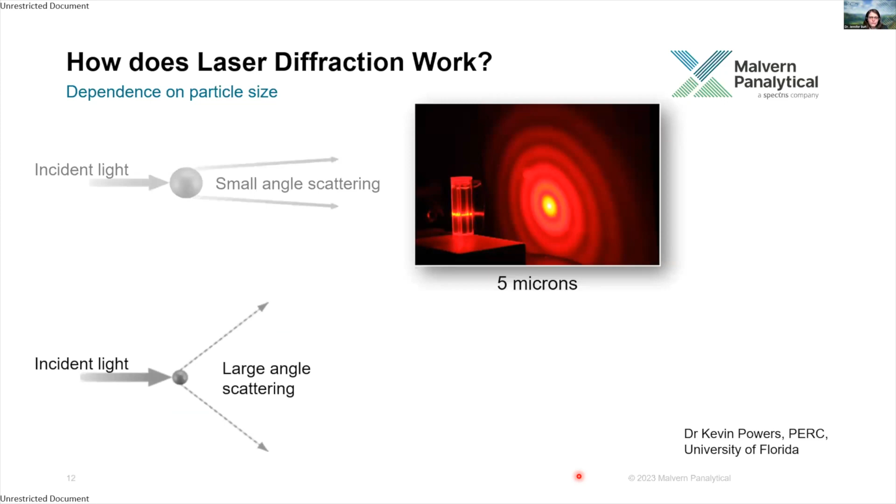So how does it work? In laser diffraction, we measure the light scattering pattern produced by particles illuminated in the laser beam. If we have large particles, we get mainly high intensity scattering over small angles, so this results in a ring pattern like the one shown here. And then as the particles get smaller, the angle of scattering gets wider and the intensity gets lower, and this results in a much more diffuse scattering as shown here. So what we're doing with laser diffraction is we're measuring the intensity of scattered light as a function of angle.

Now I'm going to look at some examples of battery materials that have been measured on the Mastersizer 3000. We're going to look at both the particle size distributions as well as the dispersion trends, which we use to investigate the state of dispersion of the material as we measure it on the Mastersizer.

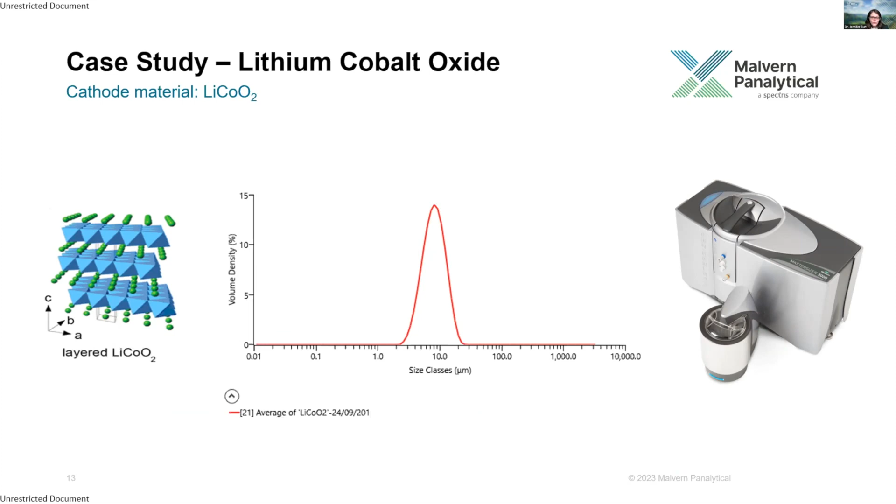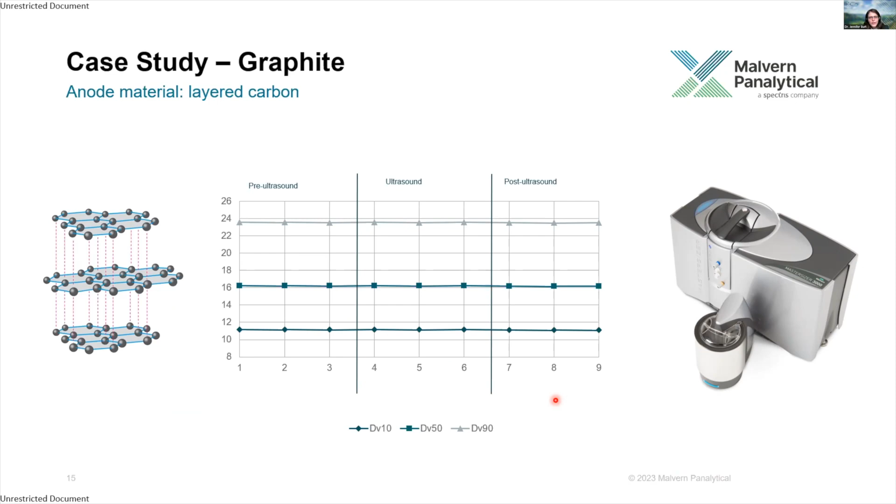And then finally, here we're looking at an anode material, so graphite, which again has been successfully dispersed in water with a surfactant. So again, the dispersion is very stable, we don't need ultrasound to disperse this material. This sample has a very narrow monomodal distribution, which is obviously going to impact the slurry viscosity for the reasons we discussed earlier.

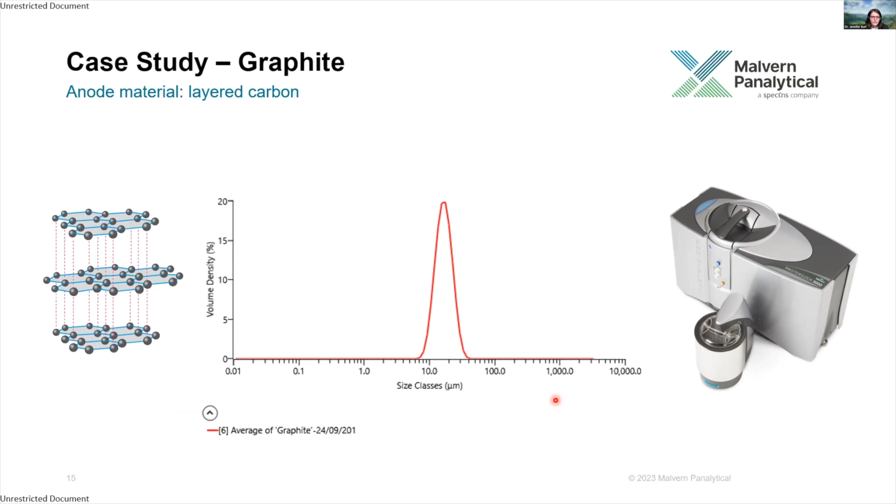So that's how we can use the Mastersizer 3000 to measure particle size. It's very fast, it's very reliable, and it's got a high throughput, we can do hundreds of measurements in a day.

In our final section, we're going to look at automated image analysis on the Morphologi 4, and this enables us to measure both particle size and particle shape.

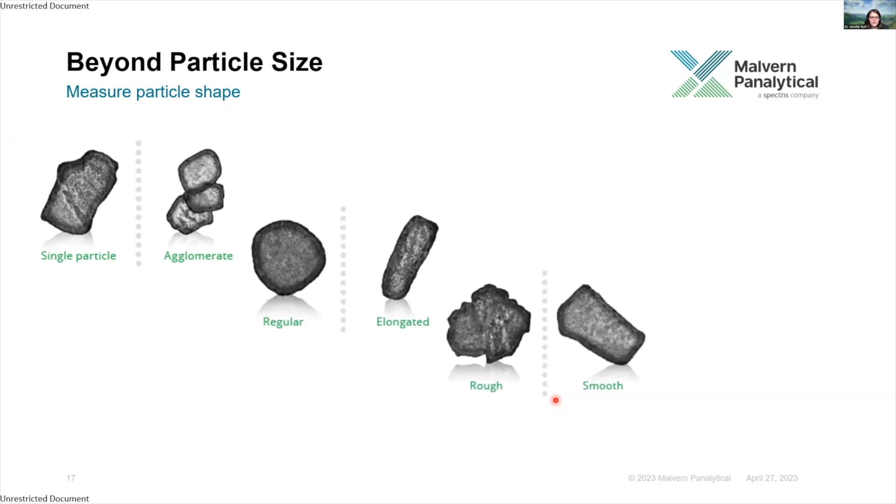As we discussed earlier, particle shape also has an impact on battery production processes. Image analysis can tell you several things: whether your material is mostly single particles or agglomerates, whether it's regular in shape or more elongated, and something about the surface of your particles, whether they're rough or smooth, which impacts surface area. It can also tell us something about how light passes through the particles, whether they're dark or light.

Traditionally, particle shape would be measured using manual microscopy, but this is very time consuming and susceptible to user bias. Automated image analysis allows the rapid measurement of thousands of particles to provide non-subjective statistical analysis of particle size and shape distributions. But how does this work?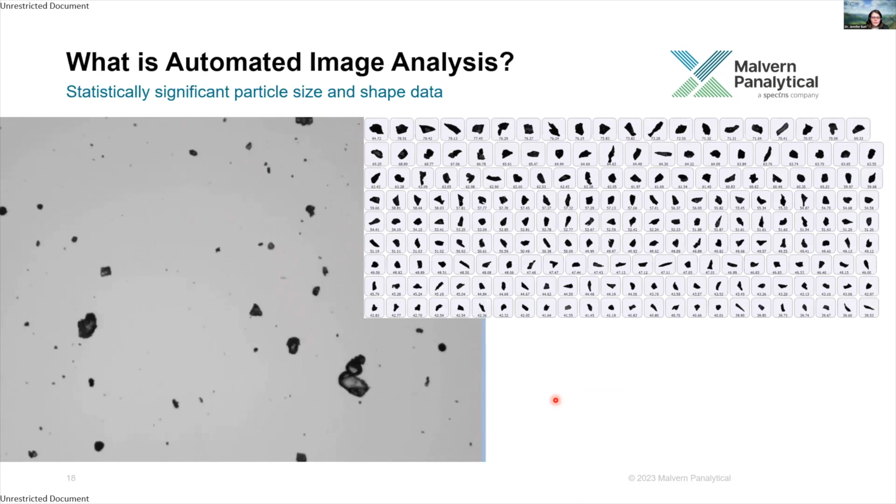In automated image analysis, we automate the capture of images of dispersed particles. We take images of hundreds of thousands of frames, and from this you get tens of thousands of individual particle images. From these images, we can extract size and shape data, such as circular equivalent diameter, length, width, circularity, elongation, and convexity, for each individual particle.

We can also build particle size and shape distributions and use tools within the software, such as scattergrams and comparison tabs, to compare these distributions and produce results.

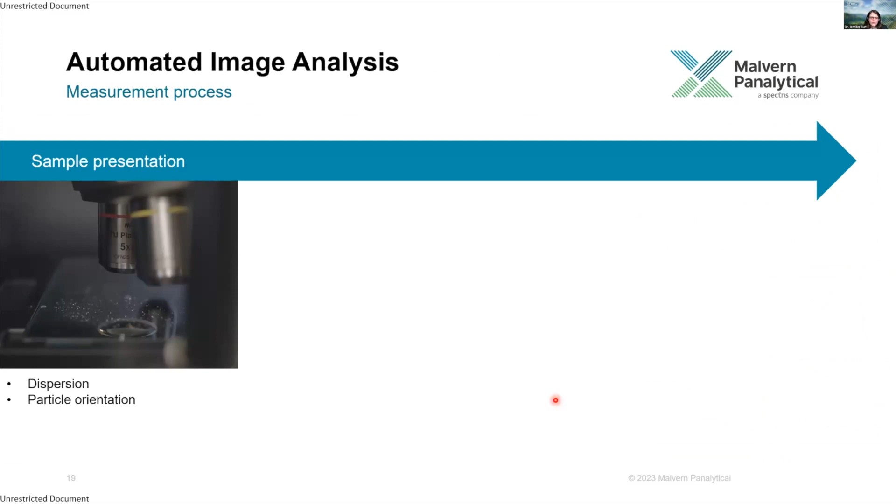There are 4 key stages to a morphological measurement. The first stage is dispersing the sample, where we want a good dispersion of well-separated particles. We have a range of different dry and wet accessories available, which allows us to look at our samples either as dry powders, slurries, or suspensions. We can also look at samples on filters. These all can be analyzed.

Next, the sample is automatically scanned, and segmentation algorithms are used to separate images of the particles from the background. These images are then processed, where a vast array of size and shape parameters are calculated for every particle in the sample. Finally, the results are reported for each particle, along with statistical results for the whole sample.

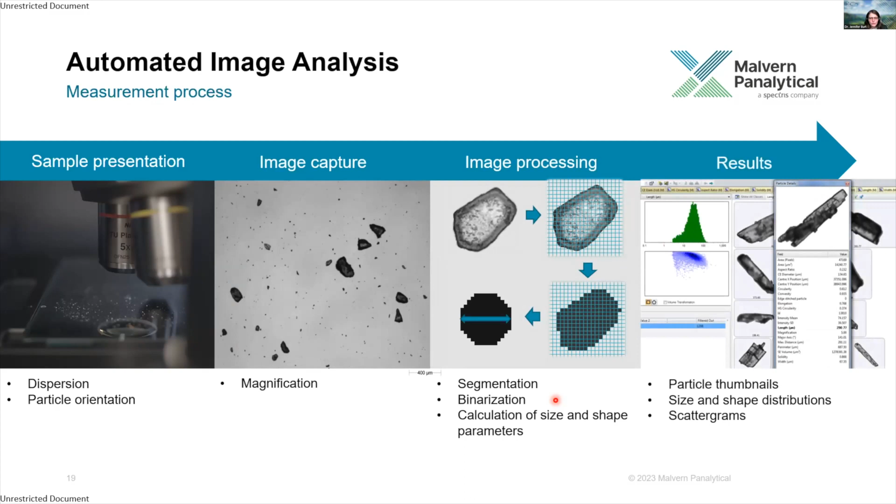Each sample was dispersed under the same conditions using the integrated sample dispersion unit of the Morphologi 4, and automated image analysis was performed at 50 times magnification. For each material, tens of thousands of particles were measured, which gave us good statistical significance.

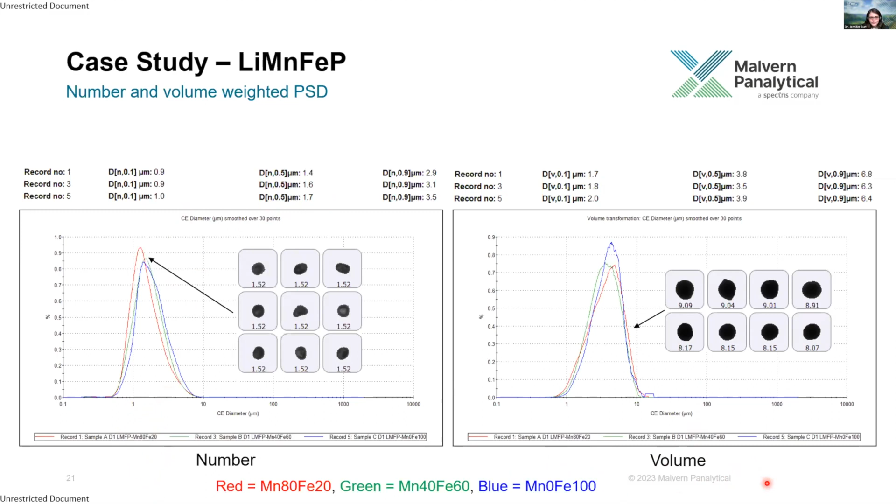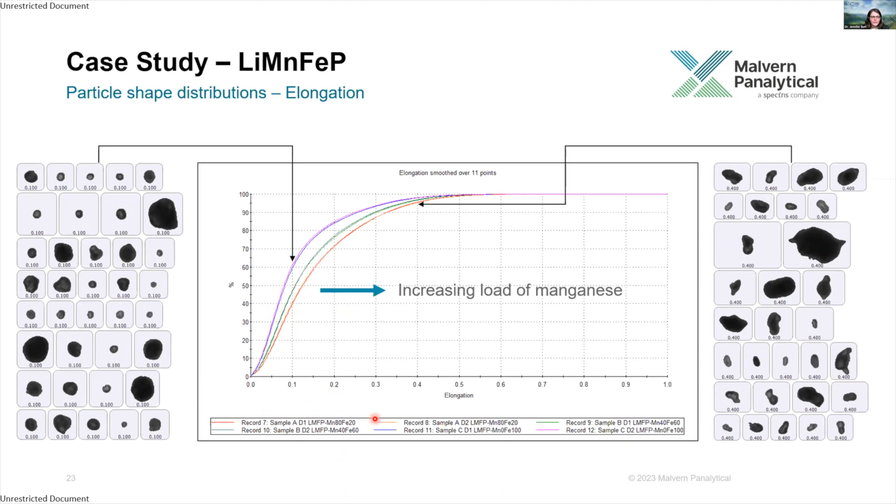So from purely iron to the 40-60 to the 80-20. Hopefully what you can also see is that we got good reproducibility from 2 separately measured dispersions of the same material, though obviously we'd ideally look to doing more repeats just to double check that.

We can also look in even more detail because we have those particle images available and all the associated information with them. You can explore these differences in even more detail by classifying the particles in the software.